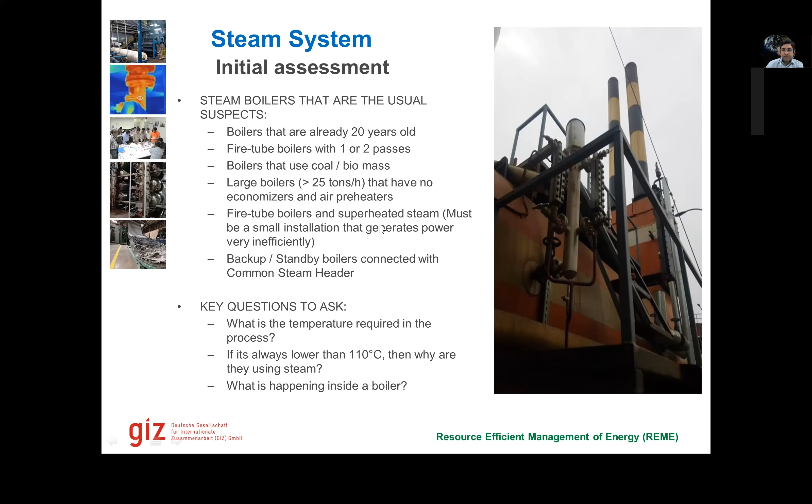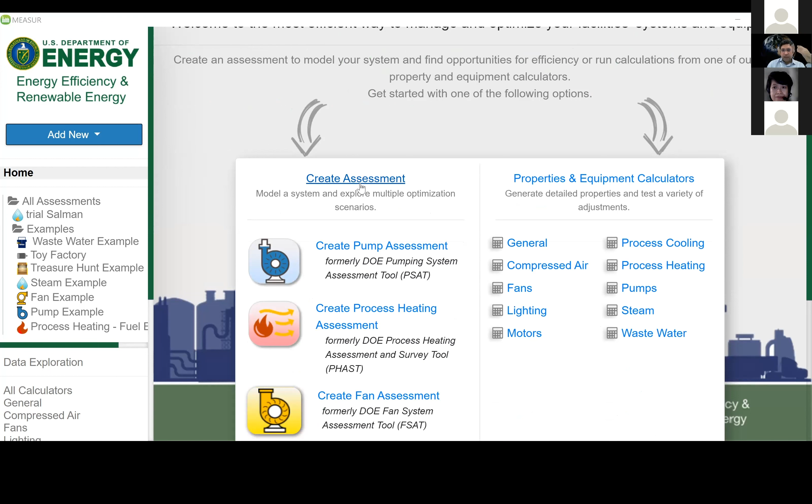When you install it, this is the main screen that you see. You can create an assessment. So you can start creating and then upload your data. And in this, you can do pump assessment, process heating assessment, fan assessment, steam assessment. Then you can also try your hand at some small calculators. Wastewater assessment can also be done using this.

Some other calculators, you can see there's some general calculators, process cooling, process heating, compressed air. They are actually improving their compressed air tool. If you go to their website, you will see that they're improving this tool and adding some more stuff here as well. Fans, lighting, motors, wastewater, steam, pumps, inventory management is also there. So there are different tools there. Some examples are also here. If you open any example, you will see how they have done some assessments.

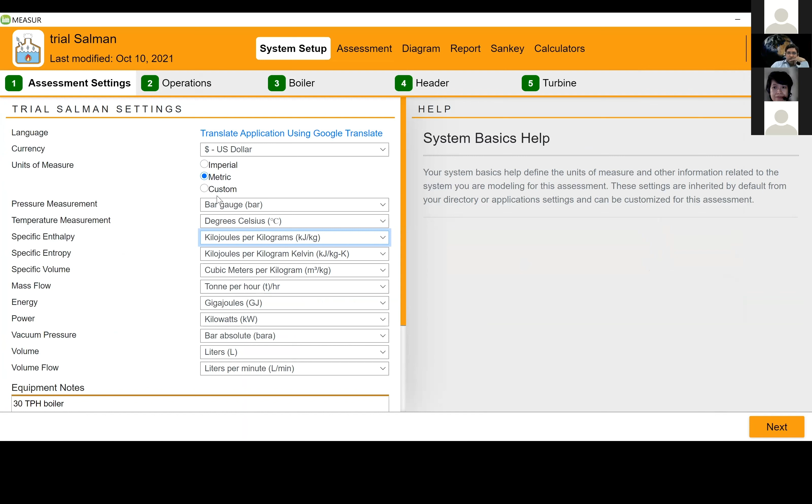Then you can do data exploration using these different tools on the left hand side. What I did was that I created one assessment of a steam system to show you this process. So when I open it, I will take you directly. This is where it takes us. System setup: it asks you what you want to do, which currency you want to use, which units, imperial, metric, or others, and then it sets the units here. You can add some notes here.

For example, this one was a 30 TPH boiler but was operating at 19 TPH. Then we click next and it takes us to operations. Here we can set operating hours, how much kilowatt of electric power it is importing, that is what we can write here. Temperature of makeup water that we are adding. Then the cost of fuel, cost of electricity, and cost of makeup water in dollars per liter, because I selected US dollars as the main

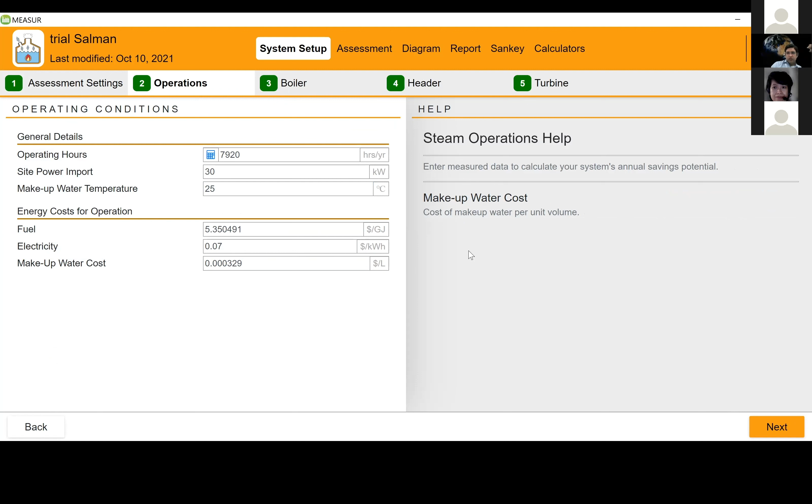currency. Then I went forward and I selected the type of fuel. So I selected solid fuel because I was using typical bituminous coal. The boiler combustion efficiency came from the stack analysis. And the blowdown rate was based on the data that was provided by the site engineer. And yes, the blowdown was being flashed. They were not directly doing anything, they were just flashing it. And they were not using blowdown to preheat the makeup water.

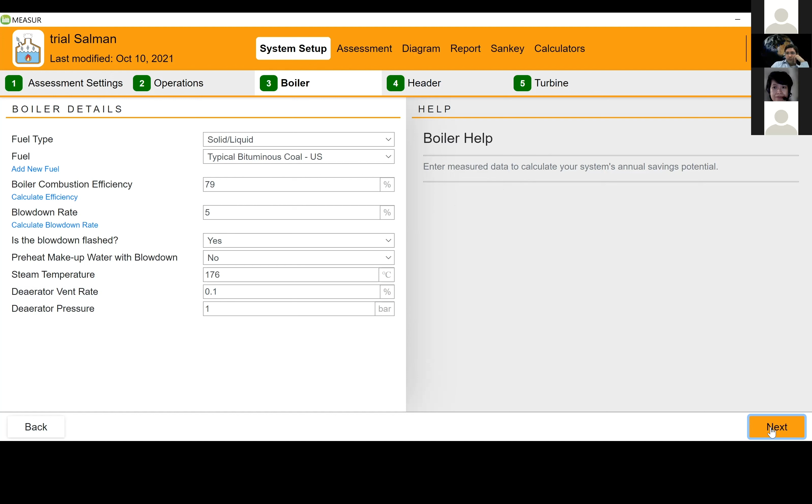Steam temperatures were 176 degrees. Deaerator vent rate was 0.1%. And the deaerator pressure was 1 bar. So it was actually 1 bar gauge, not 1 atmosphere. Then we went forward. I applied the header. So there was only one header. The condensate return temperature was 95, and they were not flashing the condensate. So it was directly going to the deaerator and condensate recovery tank.

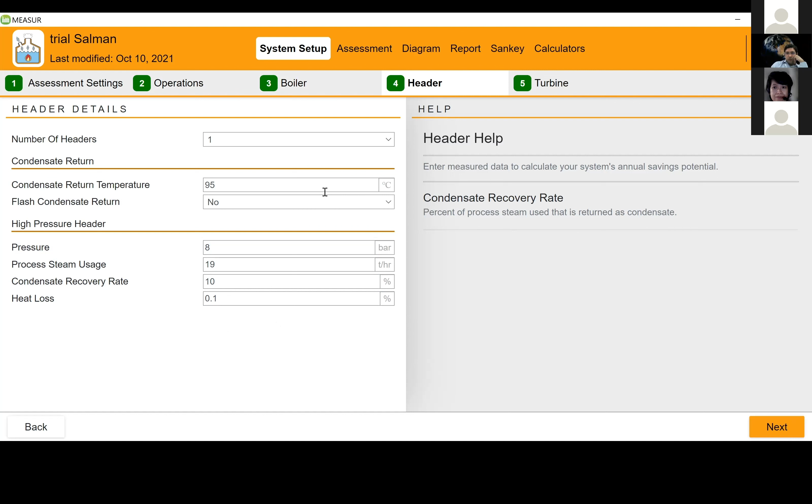Then the pressure of the high pressure header was 8 bar. Process steam usage was 19 ton per hour. Condensate recovery rate was 10% only in this case, and heat loss in the header. So the temperature difference in percentage from inlet of the header and outlet of the main header was 0.1%. You can also take help here in how to calculate these things generally. Then turbine, so this boiler did not have a condensing turbine to power energy. So this I unchecked and I moved forward.

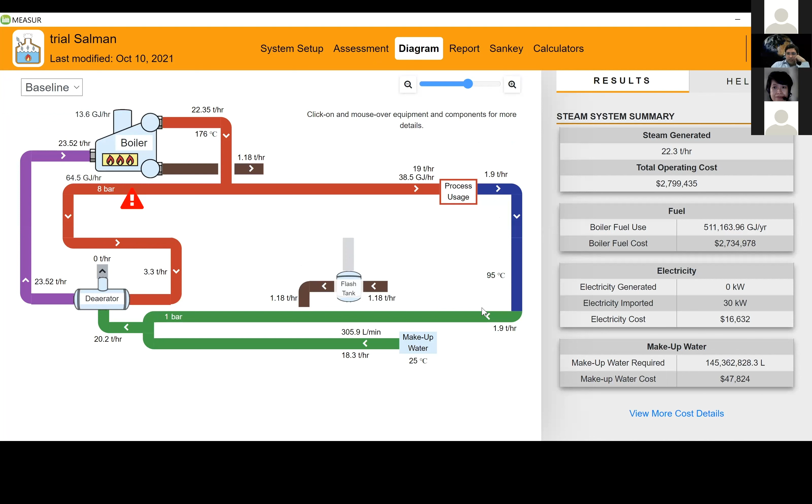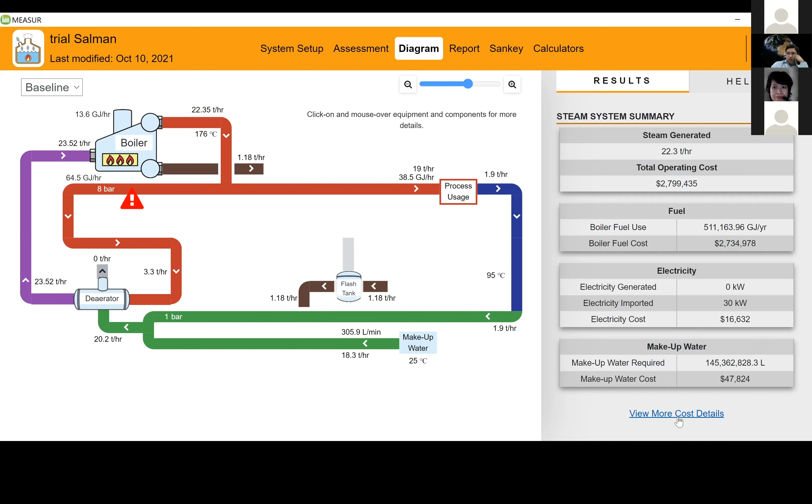When I moved forward, it brought me to the assessment where we can see the diagram. So it shows you some points where the saturation is taking place. For example, it shows you how the steam is going, where it is being converted into condensate, where the flashing is taking place, what is happening in the deaerator. So everything is there. On the right hand side, we have results. So the operating costs are there, fuel consumption, gigajoule is there, electricity generation, import, makeup water quantity, cost. And if we click on view more cost details, we also see total operating cost here as well. We can also calculate marginal cost. So there are different costs that can be calculated.

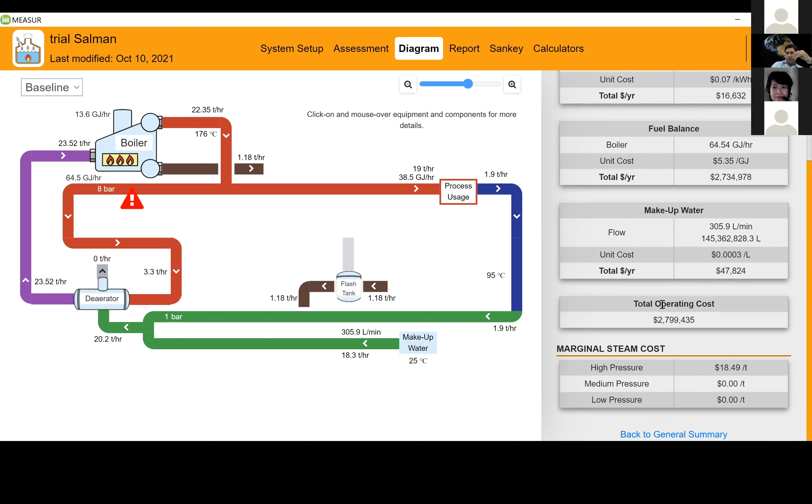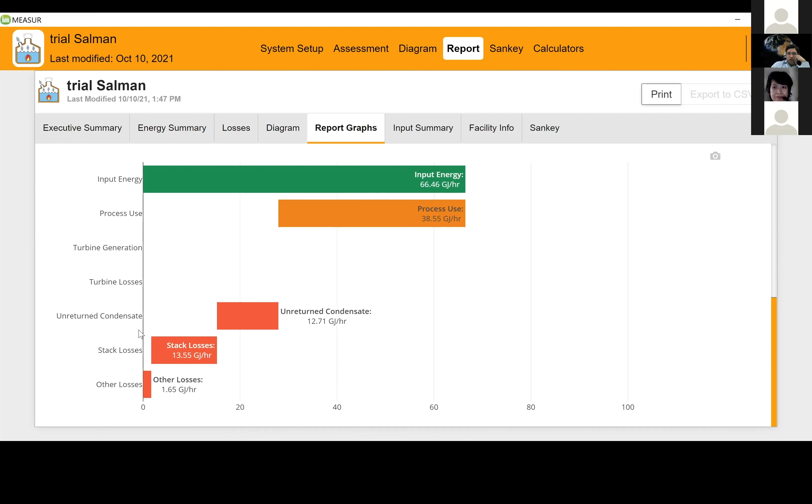Based on this, we can go to report. In the report section, we have the values in terms of percentages and amounts. We have an executive summary, we have losses calculated, we have the diagram. Report has certain graphs also there. So out of total input energy, how much is being used in process, how much goes into unreturned condensate, how much goes into stack losses, and how much goes into other losses. So these are the saving opportunities that we have here, which can be recovered. Then the input summary, what was the data provided inside, some facility info which we did not provide in this case, and a Sankey diagram.

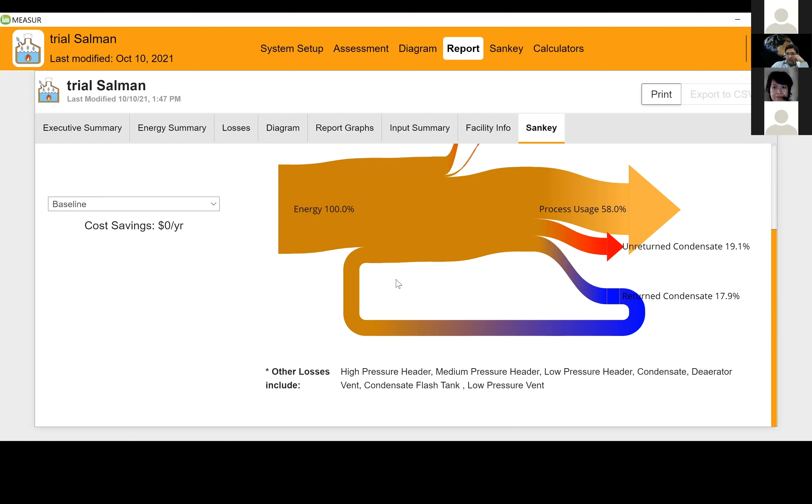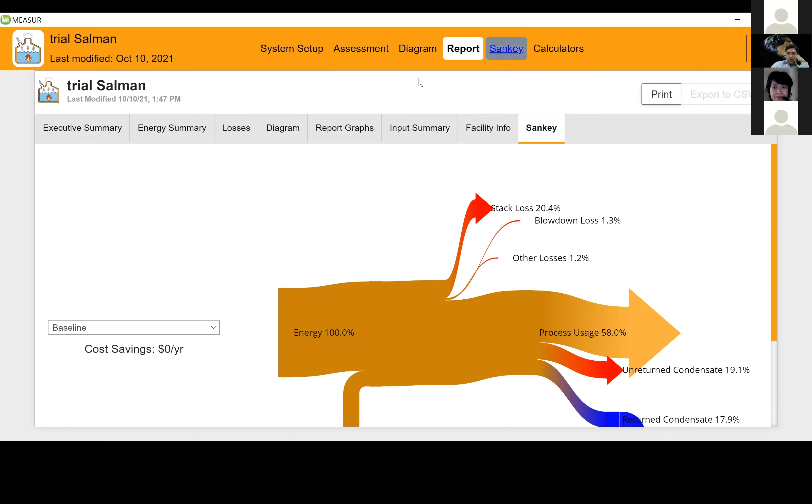So because we only did this assessment for the baseline, it provides us the Sankey diagram only for the baseline. It shows you how much total energy is going in and where it is being used. So process usage, unreturned condensate, returned condensate, blowdown losses, other losses, stack losses, all put there together. And if you click print, all these sections get printed into a report form. This Sankey also shows on top in the Sankey section. And if you go to calculators, you can have multiple calculators there. So you can do a calculation for boiler, deaerator, flash tank, header, heat loss. So all the data that we put there, if we don't have the data, we can also do a calculation here as well. So a wonderful tool, I really like it.

Some drawbacks are that it estimates the fuel intake itself. It does not let you enter the actual amount of fuel there. It also does not let you select if you are doing any heat recovery from the stack. There are no options of doing that in the main assessment. So these are the two main drawbacks that I have seen. Third is that because we have selected the solid fuel, it has not provided any option of doing assessment for the filtering process or the water showering process to remove the pollution load or calculating the greenhouse gas emissions, for example. These are the things that are missing.

But since we are all experienced auditors, we can use this assessment here and do some of the calculations manually and club them together. So the report can be generated pretty quickly rather than using a lot of Excel. We can use this and then generate the reports very, very quickly.

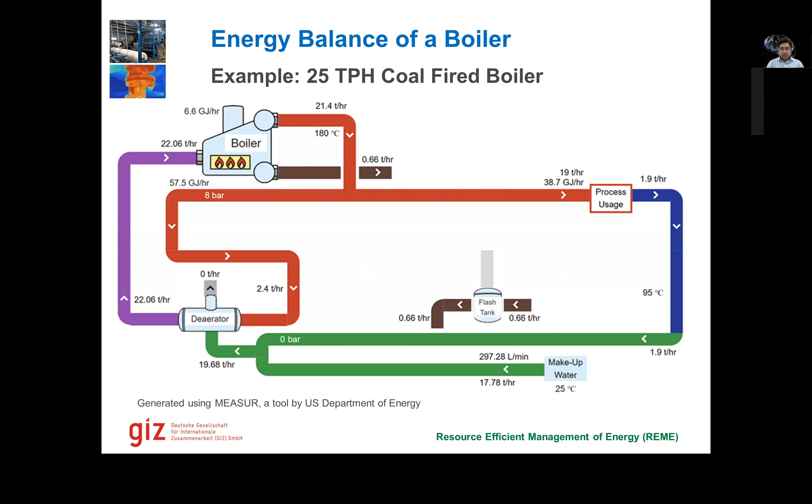Recommended to the factory that they do an optimization, install a VFD, install an oxygen sensor on the exhaust, and with that oxygen sensor and temperature monitoring of exhaust, they loop back to the VFD, remove the dampers inside the ID or FD fan, and optimize the efficiency.

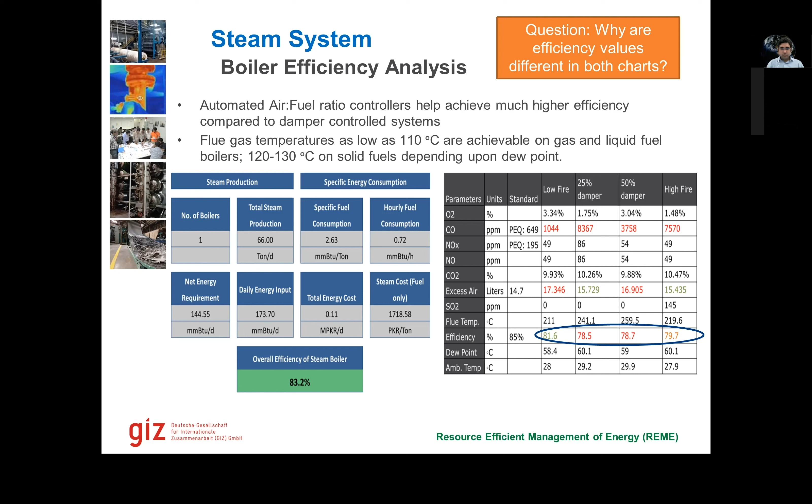On the right hand side, it is only providing combustion efficiency, based on the flue gas temperatures, oxygen content, and the moisture content, as well as ambient temperature. So it does stoichiometric calculations inside the tool. So these are two different methods. A stack analyzer only provides you efficiency of the combustion process, not the whole boiler. So that is why there's a difference. So I recommend that you calculate both efficiencies usually, so that we have a real value.

Then what we do for solid fuels is that we also do an efficiency analysis of unburnt carbon in the ash. So the coal, we did the coal analysis. Its GCV was 5914 with fixed carbon of 51.21%. The ash that came out had an unburnt carbon of 15.47% and GCV of 1412 kilocalorie per kilogram. The total ash residue was 18%.

And if we use this formula, total ash collected per kilogram of coal fired multiplied by GCV of grate ash divided by GCV of coal fired, then we can calculate the total efficiency loss. So you just have to put in the coal analysis and ash analysis, and then it automatically calculates how much percentage of loss we're making. What I usually do is I provide allowance for unburnt carbon, about 5%, because we cannot do an ideal zero unburnt carbon. And then we can have a possible efficiency improvement based on this.

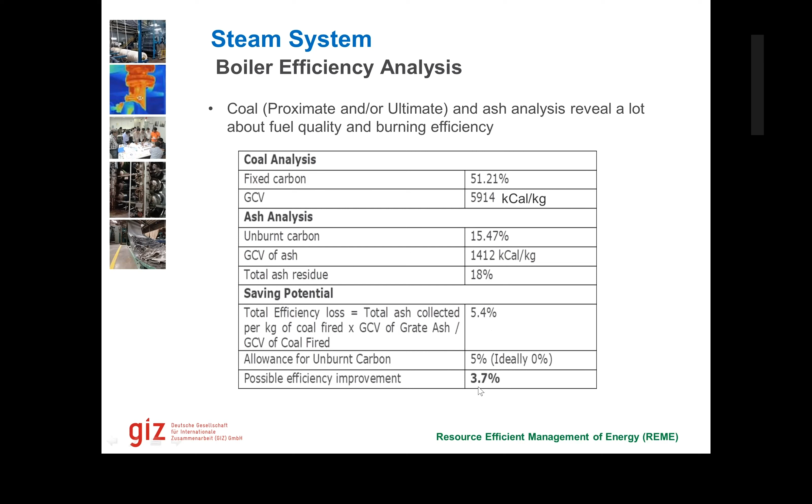And then blow down, I mean, we're all aware of the automated blow down. People are very, very hesitant, but you can see this factory was doing a manual blow down. And according to them, they had made an upper control limit of 3000 TDS and lower control of 2500 ppm for TDS. They wanted to keep the boiler blow down TDS within this range, but you can see the actual values that are there. I can only see 1, 2, 3, 4, 5, 6, 7, 8 data points among all the data points within that range. All of them are either above or below.

So when we have higher TDS, that means we missed out on blow down. Blow down should have been done earlier. When we are near or below the lower control limit, that means we are doing too much blow down. And then we are losing a lot of energy in blow down as well. So if we have automated controls, then the blow down would also be within the limits. And also the quality of steam would also be within control.

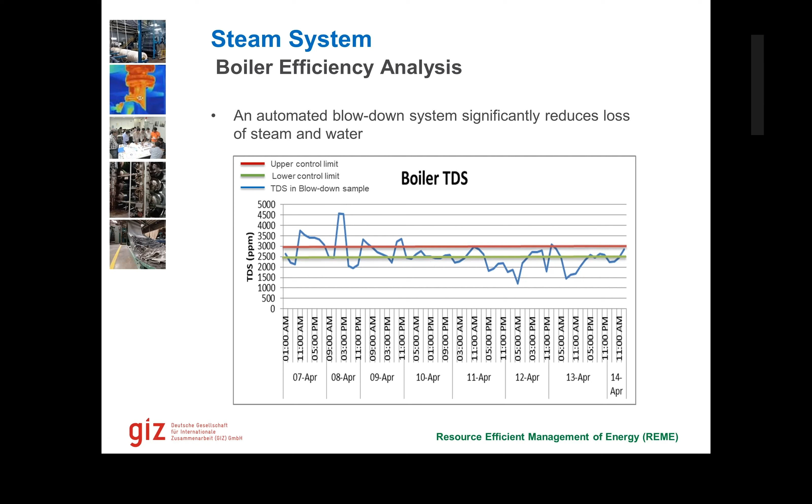Then typical network issues. This one factory, we saw that the boiler was operating at 9 bar. There was no pressure reducing valve, but still the average pressure we were receiving in the 3 sections was 7 bar. So there was a lot of pressure loss in the piping, in the bends, and in the valves. There were some leakages as well. There were some uninsulated lines which are also contributing to condensing. So these are the issues that we saw.

Pressure: we keep on increasing pressure to compensate these losses, but it's better to install pressure reducing valves. Then wastage of condensate takes place. You remember this in the textile case story on day 2. We saw that this company did not install a condensate recovery system because this machine was very far away from the boiler. This is a true case I have seen many times.

And sometimes the condensate lines are lifted. So instead of recovering condensate by gravity, they, without installing pumps, install condensate lines on top. So after the steam trap, the line is going towards the roof. That is where the piping is done, old-fashioned way. And they think that with the pressure of steam, the condensate will be lifted automatically.

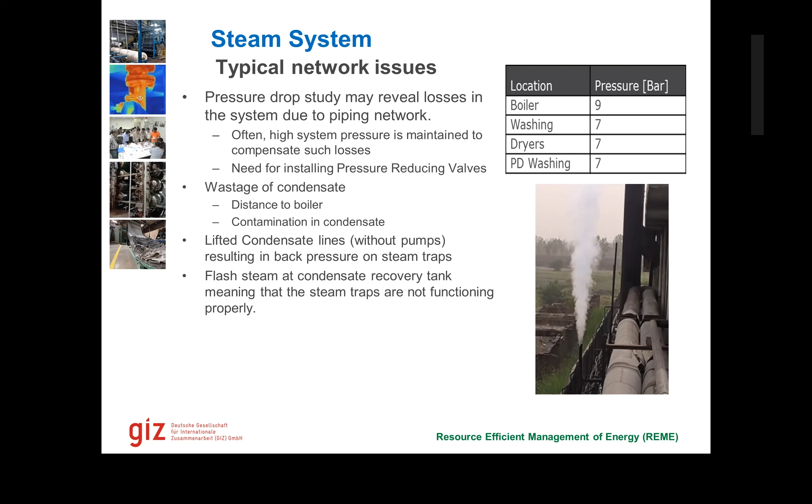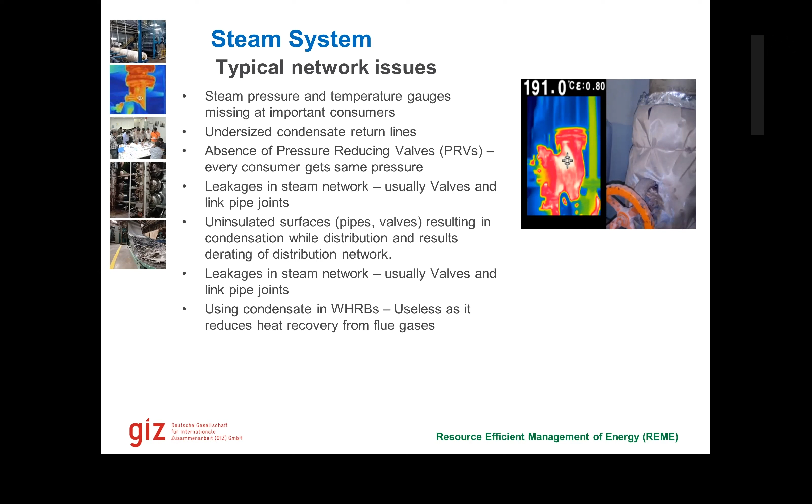Then obviously we are all aware of the losses because of uninsulated lines, because of leakages, because of absence of pressure reducing valves. These are the points that we need to look at generally. And then I saw that some companies use condensate in the waste heat recovery boilers. It actually reduces the waste heat recovery rate. So feed fresh water to waste heat recovery boilers and feed the condensate to actual boilers. That is what we should do usually.

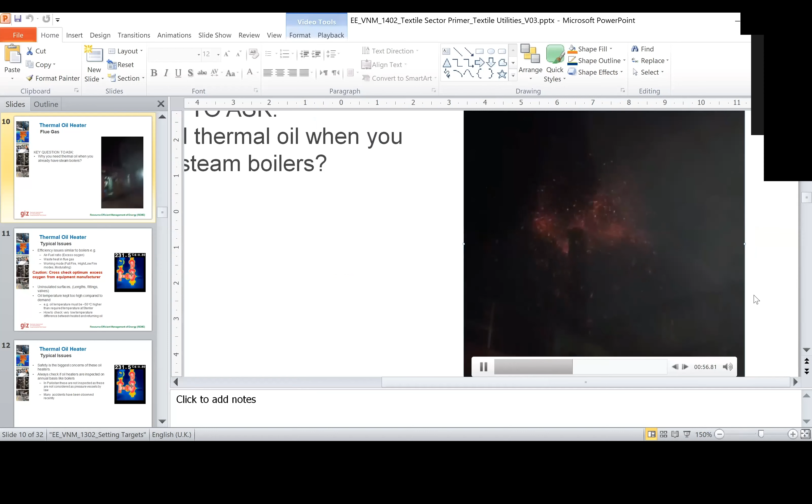And then we come to thermal oil heaters. You see some small fire particles on top where my cursor is? Do you notice it, or is it very dim for you to see these small flashy particles on top? Do you see it now? This is coming out of the stack of an oil heater, and this is a furnace oil fired thermal oil heater. It's not a biomass fired thermal oil heater.

So we thought that maybe the spray nozzles of the burner are not working properly and they're spraying too much furnace oil for burning, and maybe this is going out as particles, and when it comes out, it starts burning. So we had to actually open everything, and we figured out that there was a lot of soot accumulated in the exhaust. It was so much accumulated, then it started coming off and going out. And since the temperature was very high, when it came out, it started flashing in the air.

And this is, by the way, a paper mill. Anything could have happened. So we immediately had to shut it down, get it repaired. So the whole system was cleaned, and they did not have any record of cleaning the soot. So their maintenance practices were not up to the mark. So we did this, developed maintenance practices and improved this as well. Highly satisfied client, I must say.

The question is, why do we need thermal oil when we already have steam boilers? So for the thermal oil heater, I think the reason is in the factory, there are some processes that need a high temperature. So with the available steam source, they cannot meet the demand. For example, we need up to 200 degrees Celsius. So if we use the boiler, then the pressure will be very high. The boiler is around 8 to 10 bar, so it cannot meet the requirement of a high temperature as the thermal oil heater supplies.

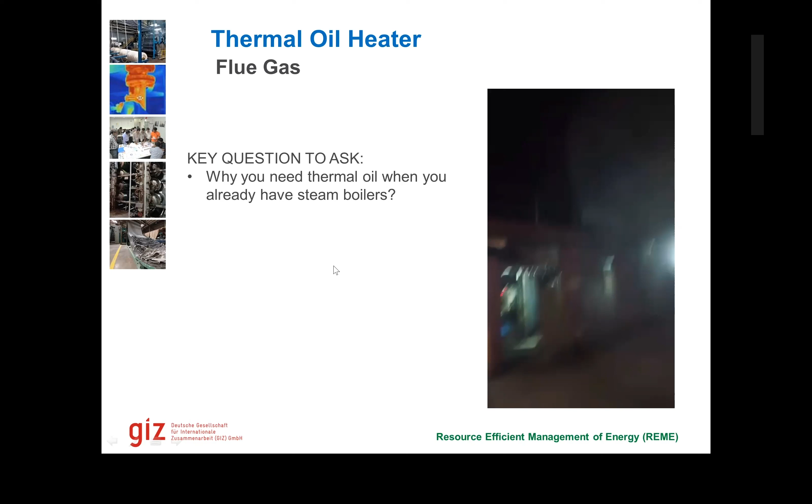So typical issues, same as steam when we talk about network: uninsulated lines, air to fuel ratio, excess oxygen, working mode, if it is working at full fire, low fire, high fire, is it modulating or not modulating? Usually they are not modulating, but they should modulate, not only between high fire and low fire, but also in between. So based on the temperature that is required in the process, they should modulate the thermal oil heaters. As I said earlier, if we need 200 degrees Celsius in the stenter, we need 250 degrees Celsius in the thermal oil.

Then talking about the air fuel ratio, managing air fuel ratio in a thermal oil heater is not as simple as in case of steam. Anyways, whether it is a boiler or a thermal oil heater, it is important to contact the manufacturer or look at the design data. So recently, for example, a thermal oil heater, we thought that we could bring down its excess oxygen from 8% to 3%. So we discussed with Inplan, who are the manufacturers.

They said that this equipment that you are looking at is optimized between 4% to 6% oxygen. So we suggest that you modulate it between 5 and 6%. So we had to revise our calculations based on that. So instead of suggesting 3%, we suggested 5% excess oxygen to this company.

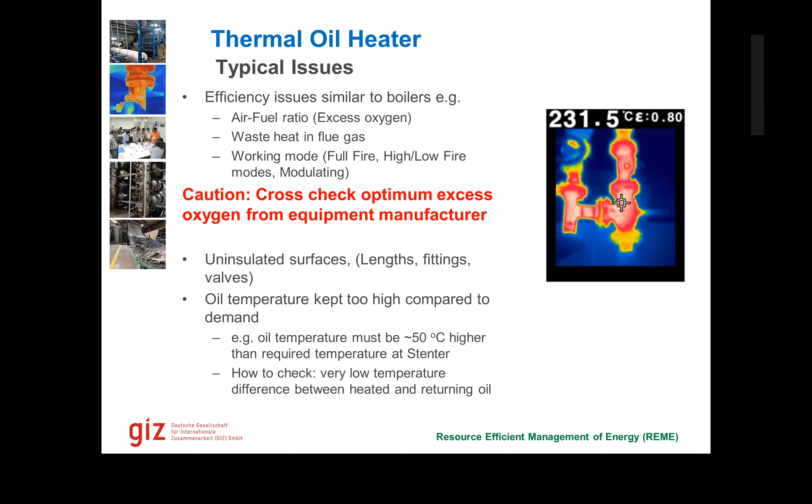So that is what we also need to look at. And then we already discussed this point of how much in additional degrees we need in thermal oil heaters, and also having a look at how much temperature thermal oil is giving up while returning back. If at the oil heater we're only getting 2, 3, 4, or 5 degrees of delta T, that means we

are overheating the oil. Then safety, because it is a pressure vessel, but unfortunately these are not inspected as pressure vessels, because in Pakistan they do not consider by law oil heaters as pressure vessels, and we have seen many accidents taking place in few years.

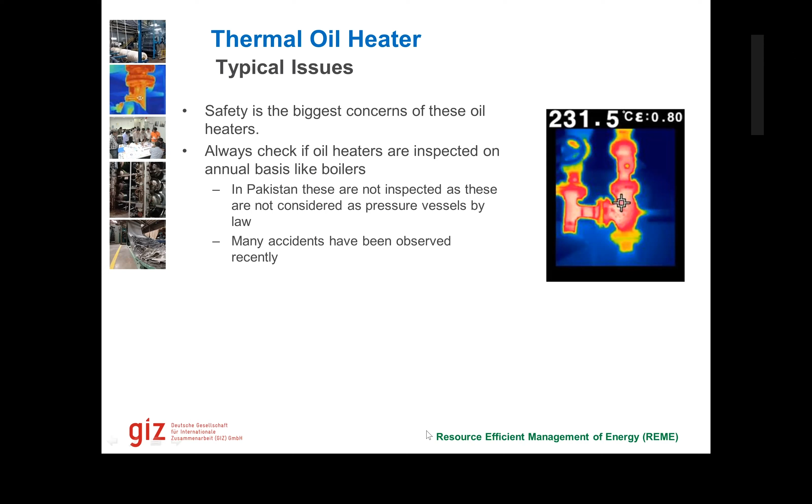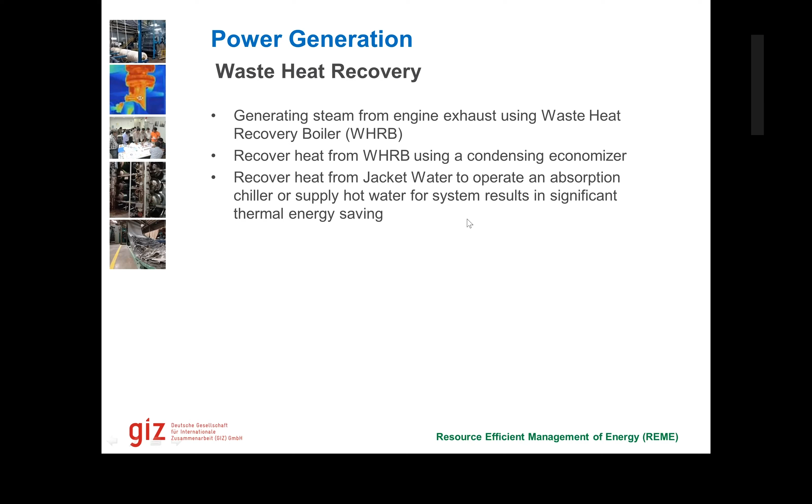Then power generation. I hope you are well aware of the heat recovery potentials in the power generation system, where we can recover heat using a waste heat recovery boiler. We can install another condensing economizer or a simple economizer on top of a waste heat recovery boiler to recover further heat, so heating up water for process. Then the jacket water or engine cooling water can also be used to operate absorption chillers or to supply hot water for the processes that bring in significant thermal energy savings.

So what we do is we use the flow rate of the jacket water. Then we see how much delta T do we need on the jacket water side, and how much delta T we can gain on the demand side using Q = m·Cp·ΔT and using the heat exchanger efficiency. So Q on the left hand side is equal to Q on the right hand side with an efficiency of the heat exchanger.

Okay, so the recoverable heat on the right hand side might be a bit lower than the heat that is available on the left hand side, and this water flow rate on the demand side needs to be calculated based on the demand side flow rate. How much water do we actually need? And if we need less water, then we'll have high temperature water. If we need high water quantity, then we will gain less hot water temperature at the outlet. So using Q = m·Cp·ΔT, we can directly calculate the saving potential that is there.

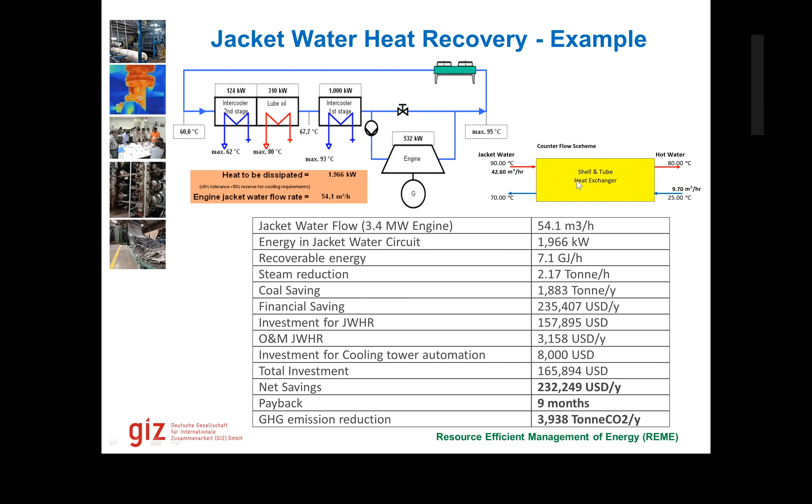A waste heat recovery boiler can also be calculated in the same way. Again, Q = m·Cp·ΔT is used everywhere in all the thermal processes. Quite similar fashion. I think we don't need to go into details of this calculation. Very similar calculation. A big amount of greenhouse gas emission reduction can be achieved here.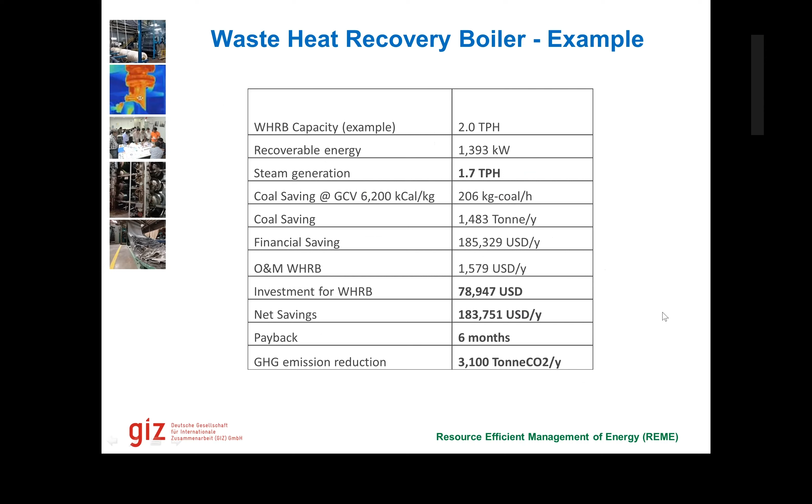Similar calculation. Normally these waste heat recovery boilers bring down the engine exhaust temperature to 150-160 degrees Celsius. This is still recoverable. Then we can install a normal economizer, which can bring it down to around 100 degrees Celsius, or we can install a condensing economizer, which is more expensive, but then it can bring it down to 60 degrees Celsius or 50 degrees Celsius.

Intentionally doing condensing in the system, recovering carbonic or whatever acid that can be produced depending on what is our fuel intake. So in case of natural gas intake, we get carbonic acid. This carbonic acid can be used in the ETP for neutralization process then. So bringing in savings not only by recovering energy, but also bringing in savings because of reduction in chemicals in the effluent treatment plant.

It is advisable to feed hot water to this system, not directly cold water. So we can use a little bit of water preheating system around 70 degrees Celsius, and then we can get water at around 95, or if it is a pressurized system, we can even get water at 100 degrees Celsius. If it's a non-pressurized system, then 95 to 98 degrees Celsius is easily recoverable. But this hot water flow rate must be according to the need of the hot water. If we don't have any need of hot water in the process, there is no need of installing the system unless we can use it in the boiler, for example, for feed water.